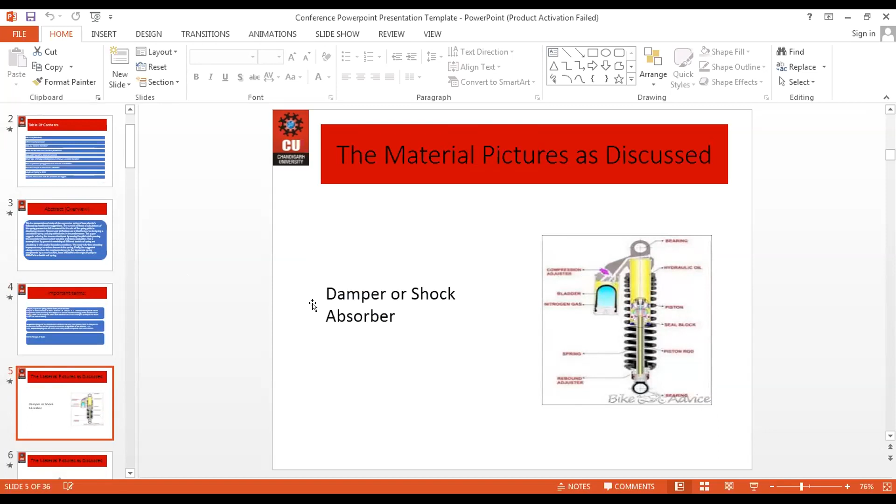After that, moving to the next slide. This is a small picture I'm attaching here, so that we get an idea of the pictorial view of the suspension spring and the damper, the shock absorber.

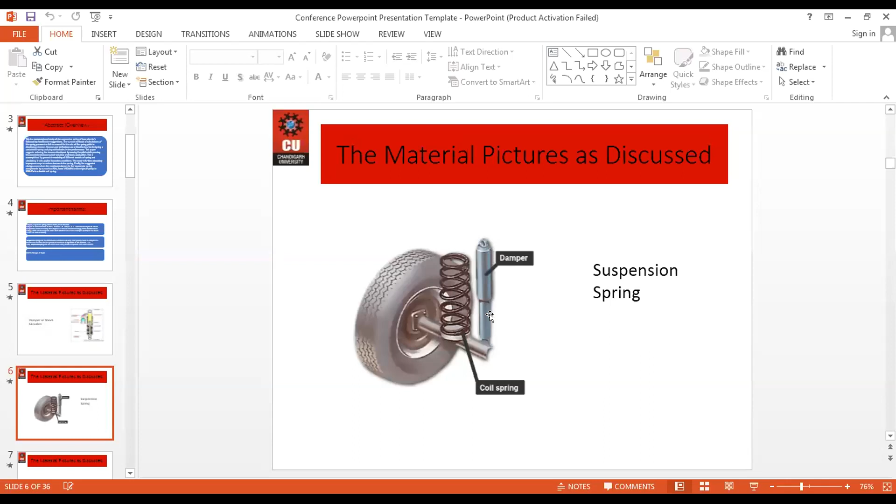Now, in the next slide, I'm going to show the material picture I discussed. You can see that the spring is like that, this is a spring, which is a coil spring, and this is a tire connected with it, and this is a damper that we're using as a shock absorber here.

So moving forward, this helical shape is the shape of the spring that we are using here to modify the two-wheeler suspension.

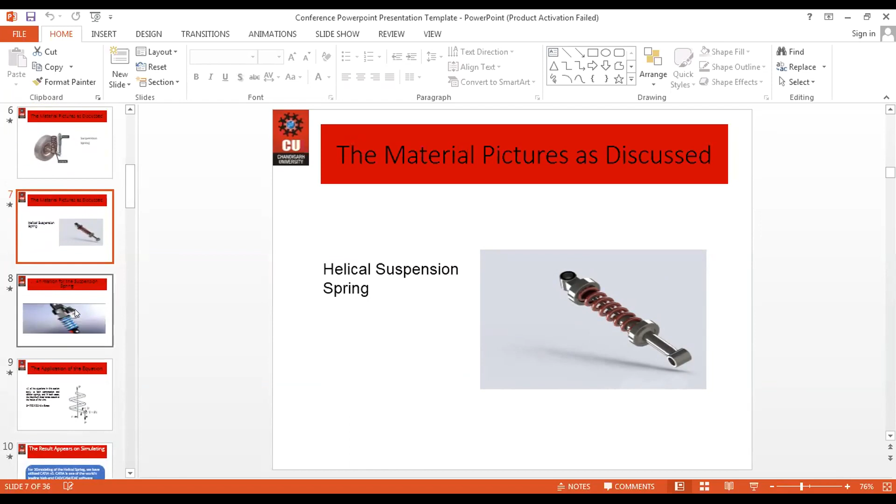I wanted to show you with the help of a video, but I think it's not working here. I don't know why.

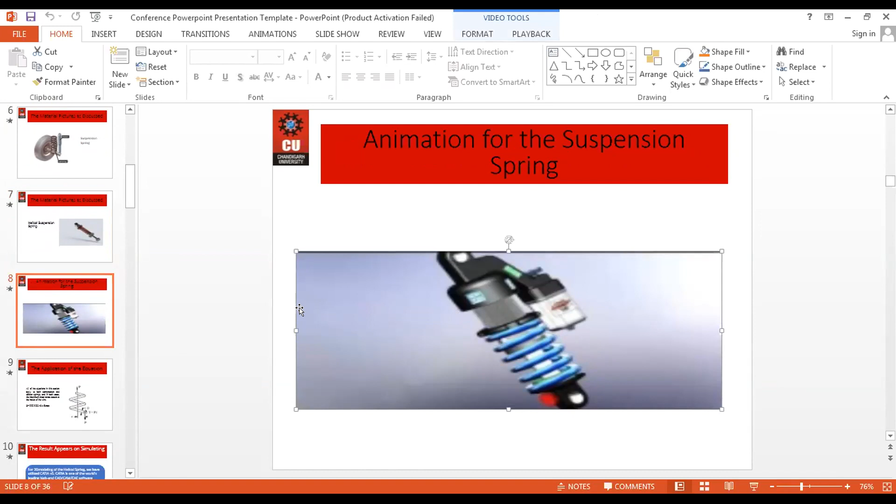Now moving forward, I'm going to explain the application of the equation, the basic idea of what kind of formula we use here to evaluate or modify the two-wheelers. All the equations in this section use compression and tension springs.

This is one type of spring, this helical spring shape, and T represents the torque, and this is the diameter of the spring. We basically use this formula: H represents the force, which equals pi times r squared divided by 4d, into 4d into stress. We put all the parameters into the formula.

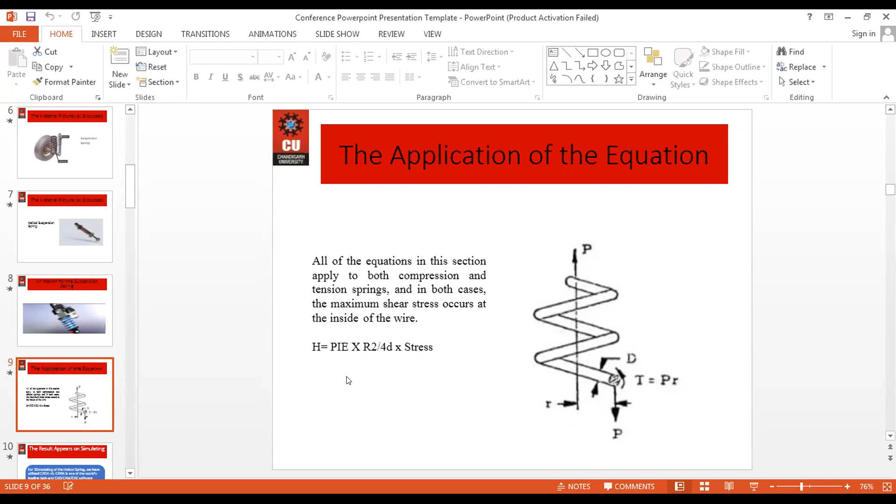If we take different types of springs, so if one spring has a different length and different diameter, we get to know how much force they experience by using this formula. I'll explain with the help of an example in the next slides.

After this formula, I'm going to introduce two simulation links. This is one of them, the simulation software, a 3D modeling software for the helical spring we are using. Its name is CATIA V5. CATIA means Computer Aided Three-dimensional Interactive Application. We use it to compare the 3D imaging of this spring, and to analyze the working and efficiency by doing this modification using this software, which is widely used by IBM and in the market.

So this is one of the springs that we use for the modification, using the software CATIA V5 for the 3D representation of the two-wheeler's helical spring.

To explain this idea, I have one example. Suppose there is one person having a weight of 75 kg, and a second person with the same weight, so the total weight of two persons is 150 kilograms. If both of them are seated on the bike, including the bike, the total weight is 215 kilograms.

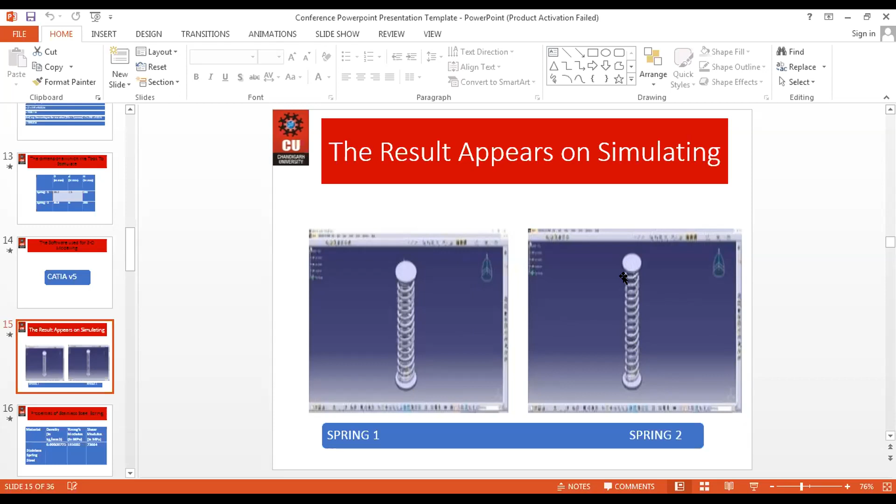These are the results from the simulation. This is the first spring with the larger diameter, and this is the second spring. So in this suspension or extension, while force is acting, the diameter is different and the length is different, but the same force is applied. Now you can see the extension or expansion of the spring in both cases with the help of this software.

In this way we can see the stress and properties of the material we are using to manufacture this vehicle spring, which is stainless steel. We are using stainless steel spring because its density is very, very low.

Its Young's modulus, compared to if I take copper or aluminum as a material, both of those materials have less density, Young's modulus, and shear modulus, making stainless steel very light in weight.

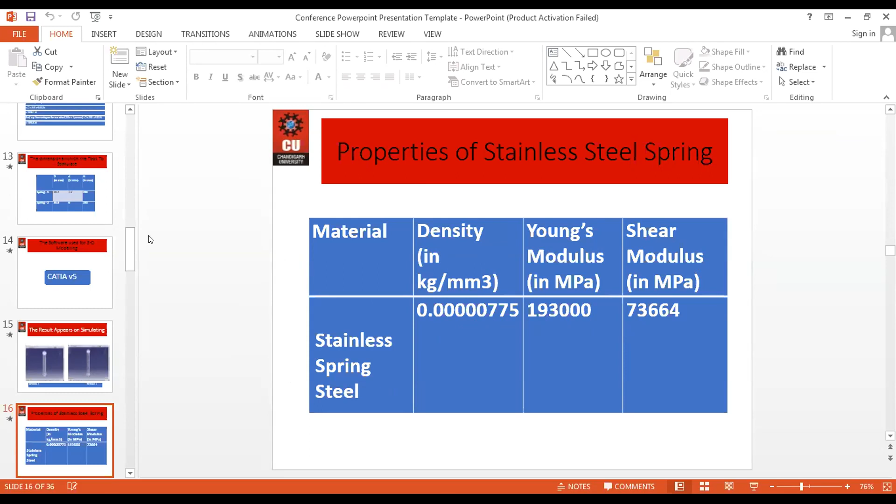After comparing and using this material, now I'm showing you the stress analysis on spring one with different expansions using this software.

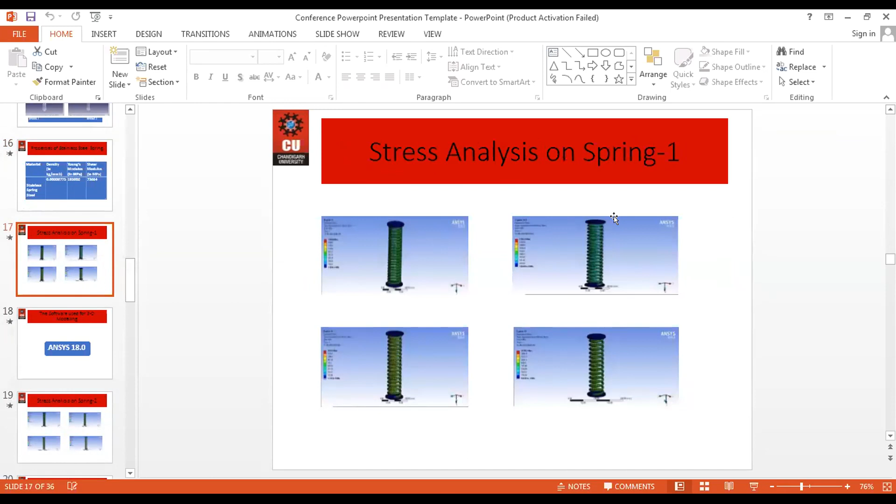Now moving to the next software we're using, ANSYS 18.0, for representing the two-dimensional representation also. This is another software used to represent the simulation part of the helical spring, and these are the related figures. After that we compare the data, which is given by CATIA V5 software, with the data from ANSYS 18.0, while varying the pitch using the different software.

Now you can see that for CATIA V5, with the pitch set to 10.5, the maximum deflection observed is 128.520, and with the help of ANSYS 18.0 software we are getting 2576. So this kind of variation in results is observed with the two software.

So this is the data for single coil helical spring two, which has the load that we calculated earlier. After that, how do we select?

The selection criteria is the same. I'm just giving you, from the above hypothetical assumptions or analysis, two examples of springs.

Taking the first spring, having diameter 56.7 millimeter, their unwinded length is 7.5, their pitch is 20, and the force acting on it is 235.

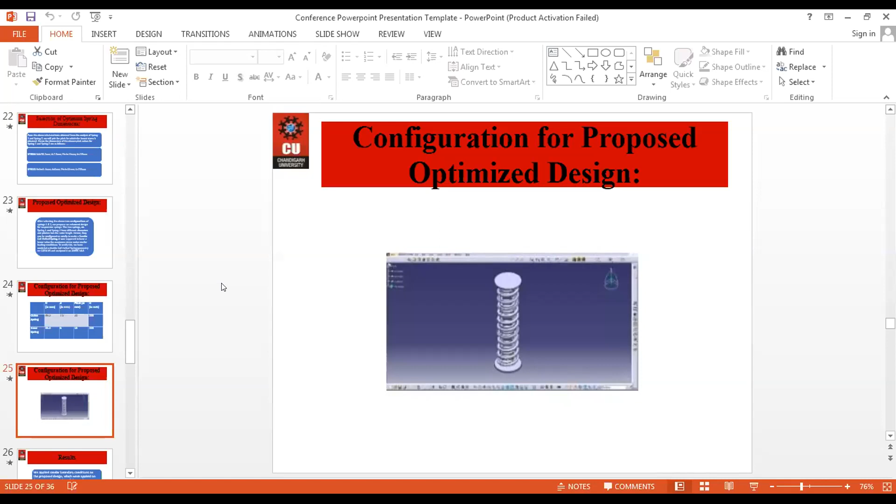Coming to the results which we analyzed on spring 1 and spring 2: after the analysis, we found we can use spring 1 as an inner spring, and spring 2 as an outer spring. When we combined both springs, a helical spring was proposed, and we used stainless steel as the material of the spring.

Stainless steel will not rust easily, and it can take much stress easily. Rather, if you use copper or other aluminum material, it will just break or rust easily.

The boundary conditions which we fixed, as explained by my professor, were: we fixed the load at one end to be 1406 Newton and the other end to be 1896 Newton.

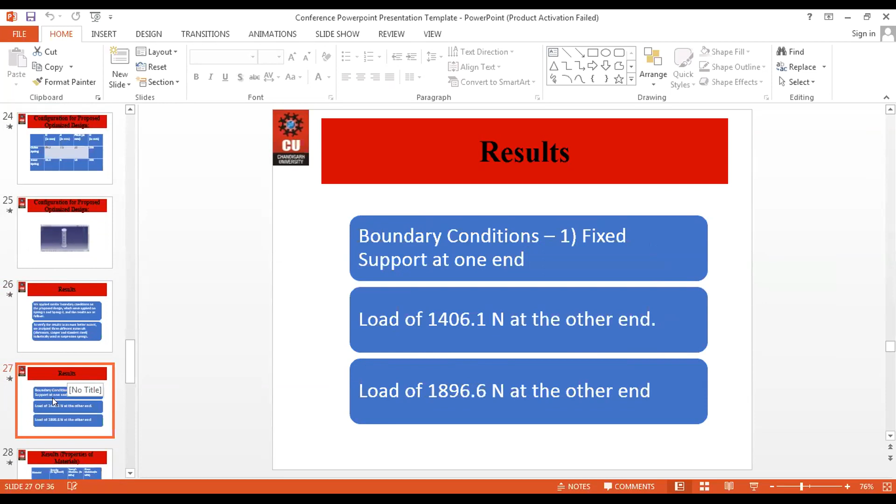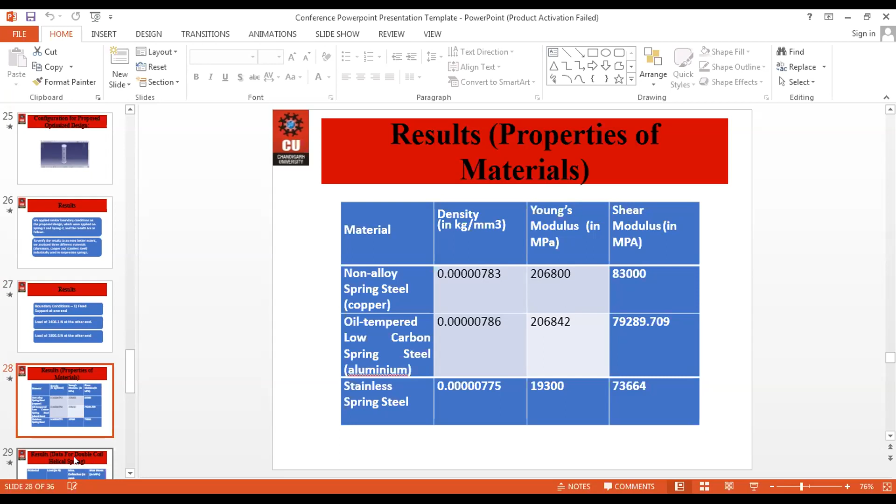The reason for choosing stainless steel was that among the different densities, stainless steel had the least density, and its Young's modulus was also the least. Since we are reducing the stress based on shear stress modulus, we used the shear stress of stainless steel, which was the minimum among the materials considered.

When we calculated it on CATIA V5 and Ansys 18.0, we found that when the load of 1406 Newton and 1896 Newton was imparted on stainless steel, the maximum deflection of the stainless steel corresponded to what result we were expecting. So we used stainless steel.

We did not use non-alloy spring steel and oil tempered low carbon spring steel because the results were not as expected. The force, pressure, or stress which we wanted to reduce was not reducing as much as with the stainless steel.

The observations which we did on CATIA V5 and MATLAB—we plotted all the graphs on MATLAB, and those graphs are shown in the next slide.

Ma'am, next slide please. For the second spring we had proposed, the observation of that graph is in the next slide. This is the analysis of the graph: as first is the stainless steel, the graph is decreasing and increased a little, but it suffices the needs.

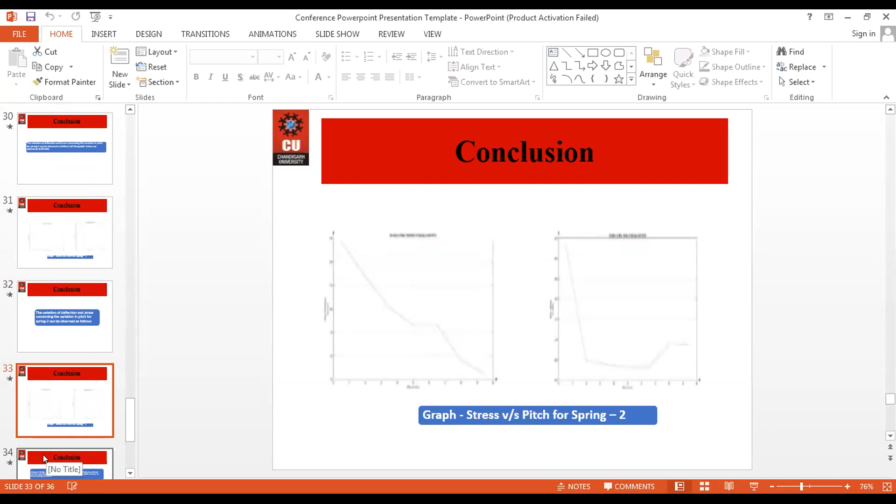Ma'am, next slide please. The proposed design has, as already explained by my professor, that spring one has pitch 20 millimeter and the second spring has pitch 15 millimeter. The forces and boundary conditions we set are already explained, and the double coil helical spring is 958.20.

Ma'am, can you move to the last slide?

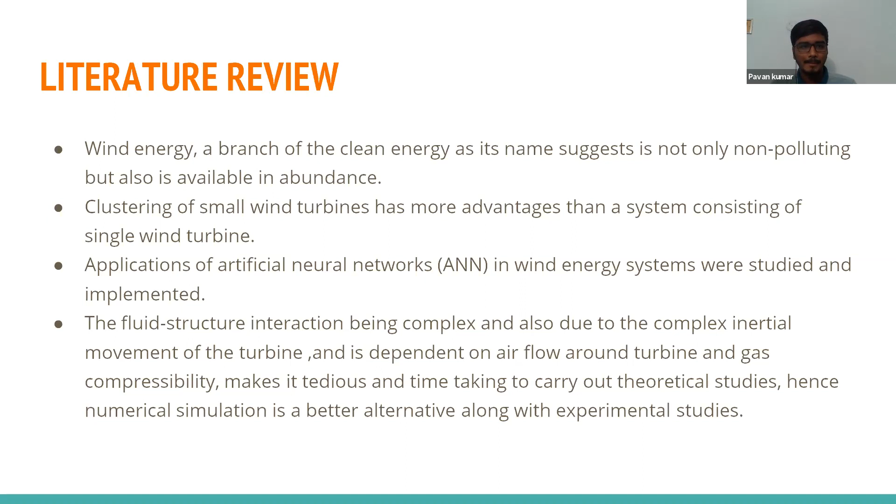CFD is a numerical simulation method that can obtain the flow field around the turbine virtually, and also we can calculate various parameters required for estimating power output and other such quantities. TRNSYS has a predefined component used in renewable energy systems that can be modified according to our system. For example, we can enter our power curve data of the turbine according to our system. An economic feasibility study was also conducted using thermoeconomic analysis, and results were studied.

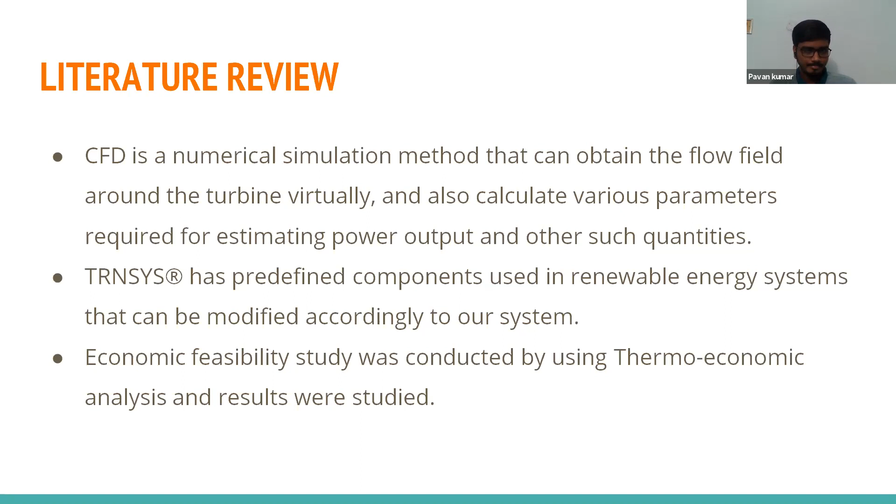ANN analysis: we have conducted two types of analysis, namely classification analysis and time series analysis. ANN technology can map input vectors to the corresponding output vectors without assuming any fixed relationship between them. In this study, ANN is used to estimate the presence of a number of turbines at a certain height. Input data given has three features, which are height, wind speed, and power generated from the turbine at that particular height.

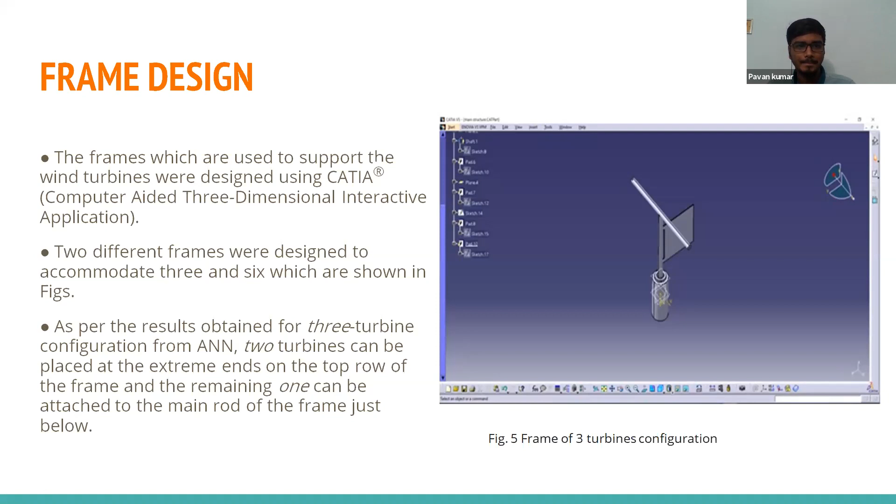For the 6 turbine configuration, 3 turbines can be placed on the top row, 2 on the row below, and the remaining one can be attached to the main rod further below.

The bearing, shown in the figure, allows the main structure to rotate about the vertical axis, and the tail helps to align the direction of the wind. This is the tail. The lower part of the frame will be welded to the outer race of the bearing, and the upper part will be welded to the inner race of the bearing.

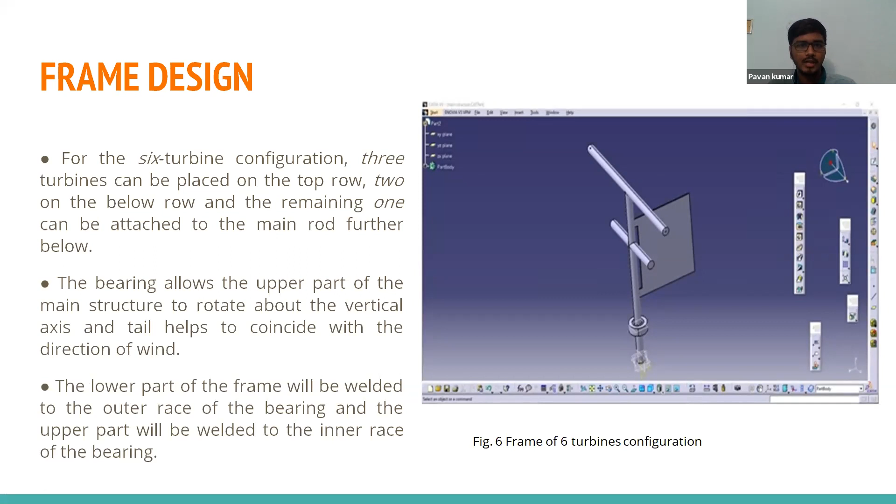CFD analysis was done in ANSYS. The flow analysis of the turbine system at different velocities was carried out for 3 different cases: single turbine system, 3 turbine system, and 6 turbine system.

The mathematical model used for the simulation was a realizable K model with scalable wall conditions. The boundary conditions given were constant velocity at the inlet and constant pressure at the outlet, that is 0 gauge pressure.

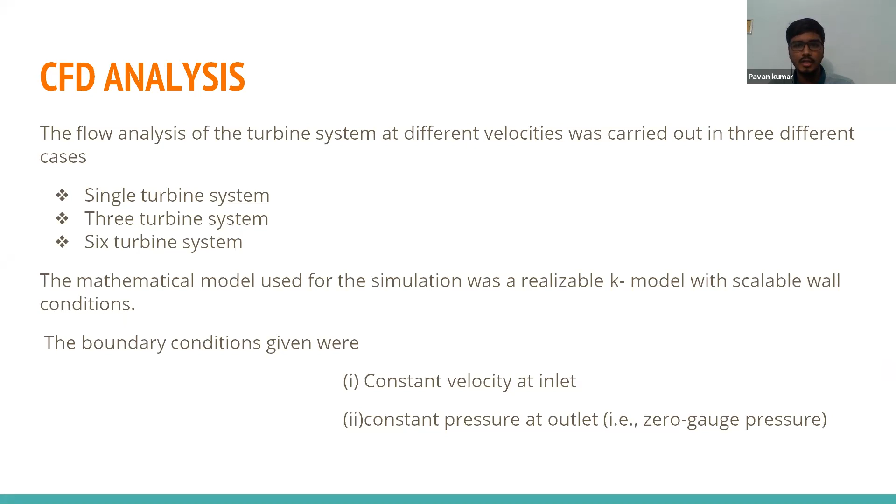The flow analysis was carried out for the single turbine system at different velocities: 4, 8, 12, and 16 meters per second respectively. The moment was obtained, and the power was calculated with the help of a formula.

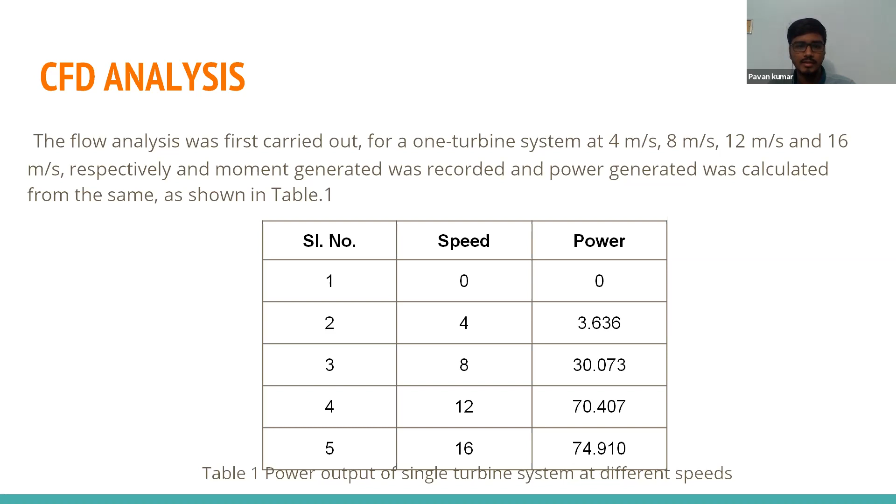Power equals torque multiplied by omega, the angular velocity, which is the angular speed given to the mesh rotation. The speeds and power obtained are tabulated as shown. For 0 speed there will be no power obtained, and for the velocity of 16 meters per second, we got 74.9 watts.

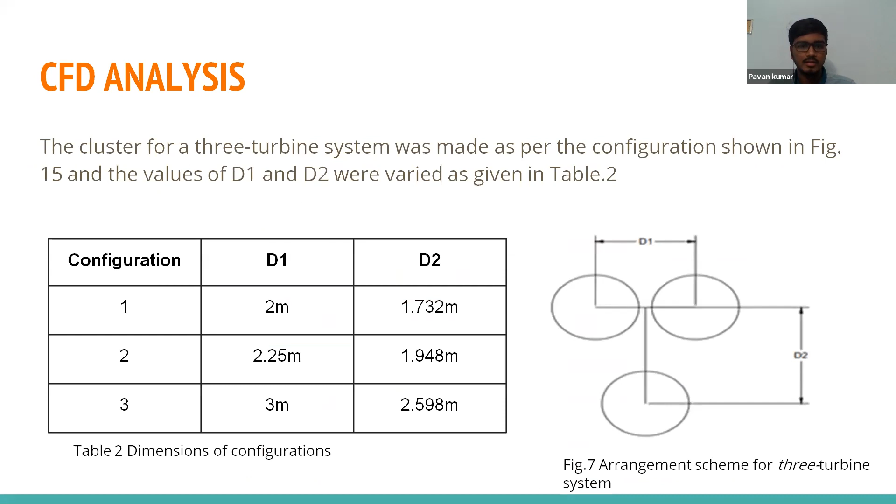Similarly, the same analysis was done for the cluster of 3 turbine system, as shown in the figure. D1 represents the central distance between the 2 turbines present on the top row, and D2 represents the height between the first row and the second row. These configuration dimensions are tabulated.

For each analysis, the same velocities were used: 4, 5, and 6 meters per second. In each case, the moment generated was noted and the corresponding power generated is shown in the table. For an interdistance of 2 meters, we got an average power of 32.867 watts; for 2.25 meters, average power was 32.874 watts; and for 3 meters, average power was 32.661 watts.

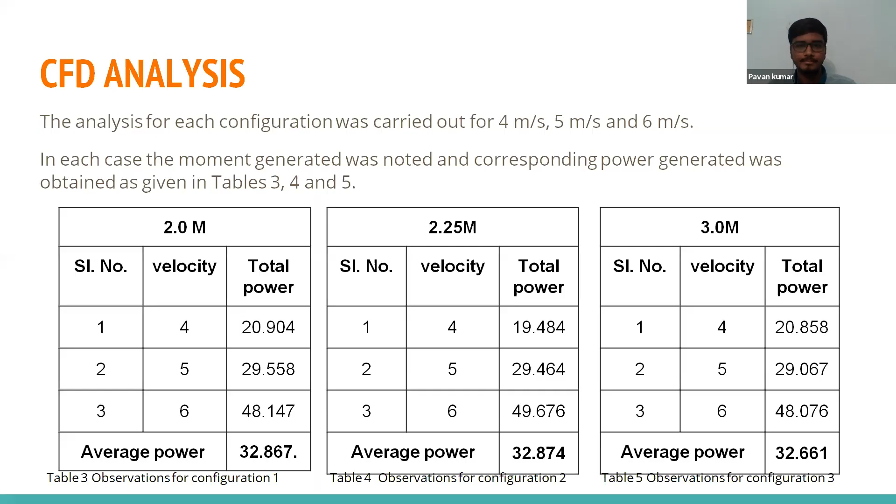Spatial arrangement for the 6 turbine system was made as an extended version at 2.25 meters. Similarly, 4, 6, 8, and 10 meters per second were given as inputs, and the total power obtained was tabulated as shown.

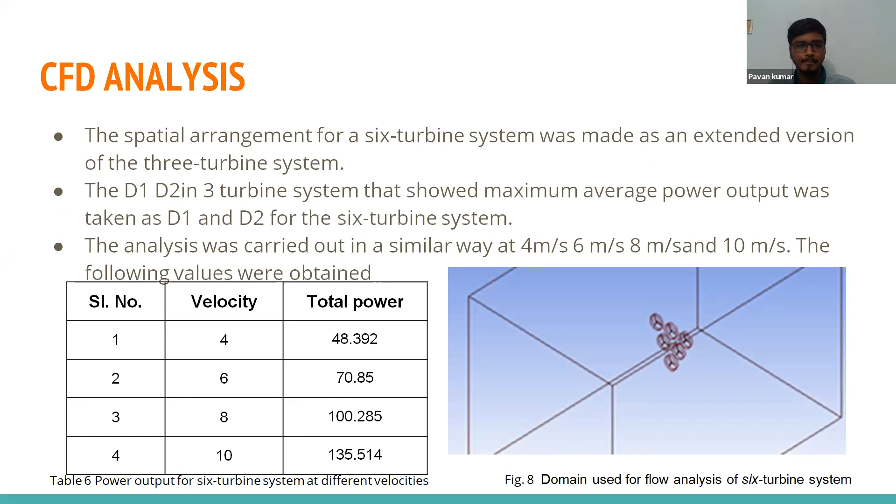TRNSYS and Excel based analysis. With the results obtained from CFD analysis power curve, plots were plotted in Excel using different configurations of the turbine, using the trend lines. Our system in TRNSYS consisted of 4 components: input file, wind turbine, printer, and plotter.

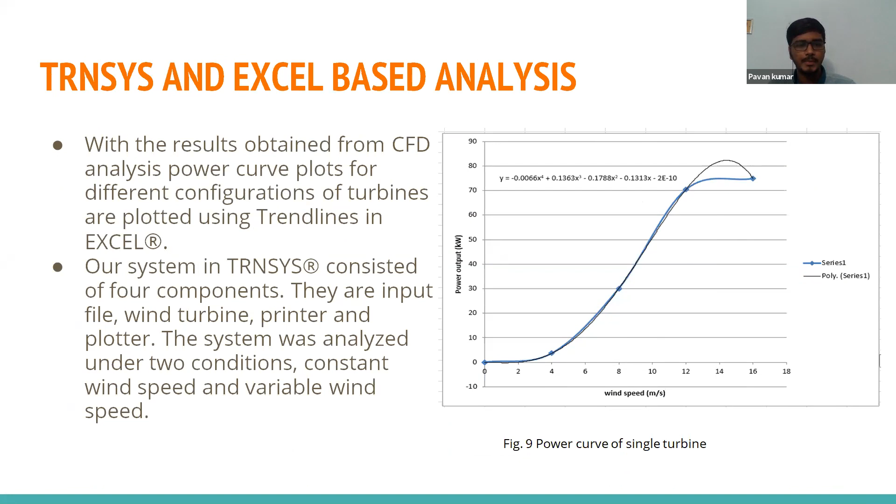The system was analyzed under 2 conditions: constant wind speed and variable wind speed. An experiment was conducted to validate the system in TRNSYS under constant speed conditions. The experimental setup consisted of a fan, a turbine, fan stands, and other measuring equipment like multimeter and anemometer. So this is the experimental setup.

We gave a power of 28 watt to the input fan, and it produces wind. There would be some losses, and the wind turbine will produce energy from the wind, kinetic energy of the input, and the kinetic energy of the remaining wind. The velocity just before the wind turbine was 2.1 meter per second, and the velocity just after the wind turbine is 1.6 meter per second.

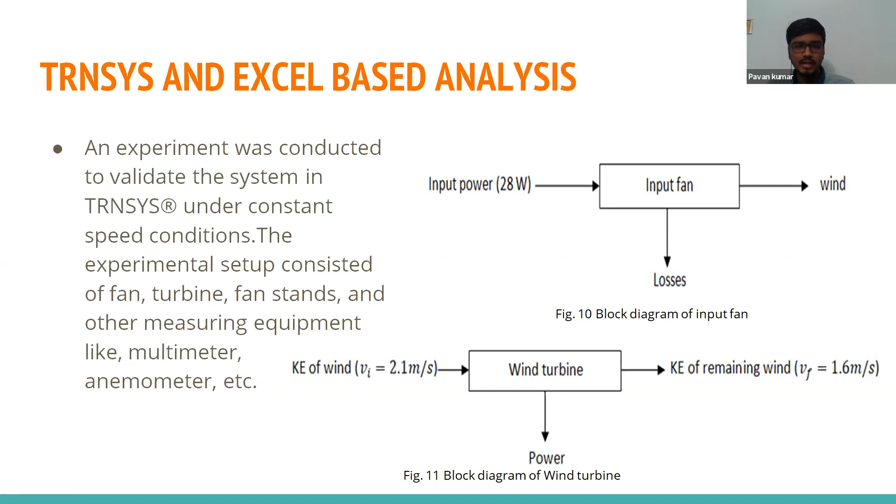The difference between these kinetic energies will be collected as power. So from the TRNSYS and Excel based analysis, the power output obtained from TRNSYS are matched with the experimental results. That is, we gave an input which is constant power, and we can see a red line which is also a constant line showing in the TRNSYS.

For variable wind speed conditions, we used annual weather data of Kozhikode location situated on the southwest coast of peninsular India as an input to the system. We analyzed the system in Excel and plotted the annual power output curves for different configurations of turbines with the help of trendline equations.

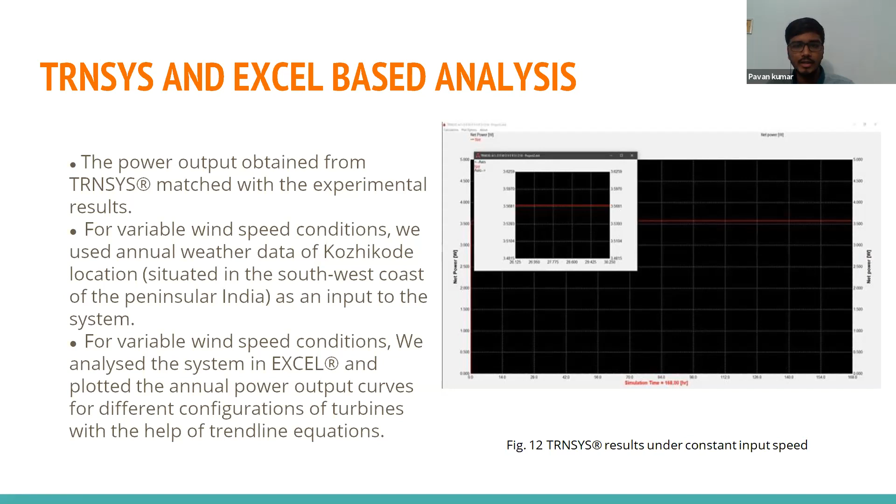Thermoeconomic analysis. This analysis is being conducted to analyze the economic aspects of this project and to understand the economies of scale, and to find the best configuration from both thermal and economic aspects. This analysis is conducted in 3 cases, namely using a single turbine, 3 turbines, and 6 turbines.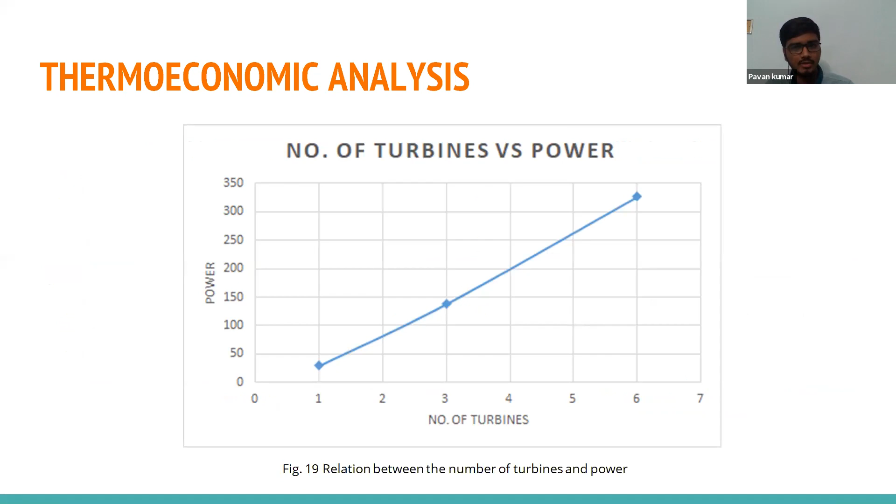And number of turbines versus power, as we know, as we increase the number of turbines, input velocity is constant. So more number of turbines means more power is produced.

Results and conclusion. The moment obtained from the simulation using ANSYS was used to calculate power output at different velocities, and using this, the power curve data was plotted for single turbine system, 3 turbine system, and 6 turbine system. For the 3 turbine system, the fan to fan distance was varied, and 3 cases were observed for the power output, and a configuration correlation was obtained.

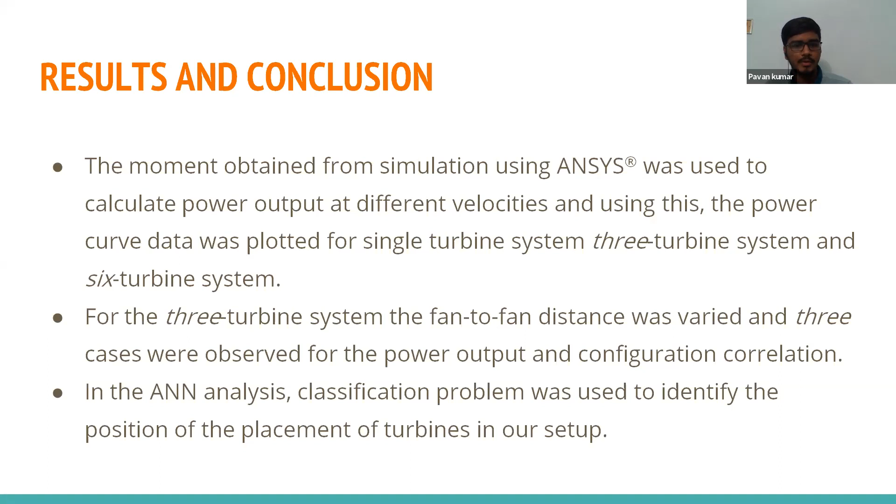In the ANN analysis, a classification problem was used to identify the position of placement of the turbines in our setup. These results were used to validate the positions taken in the ANSYS analysis, and all subsequent analysis were done, such as CFD and Thermoeconomic Analysis.

The data obtained from the flow analysis conducted on ANSYS were used to prepare the power curves of the 3 different sets of turbines in TRNSYS and MS Excel. With the power data curve obtained and the weather data, it was seen that the annual power generation was as follows.

For the 1 turbine system, it was 29.20 kilowatt hour, for the 3 turbine system, 138.1 kilowatt hour, and for the 6 turbine system, 326.5 kilowatt hour. As we see, as the number of turbines increases, the power produced also increases.

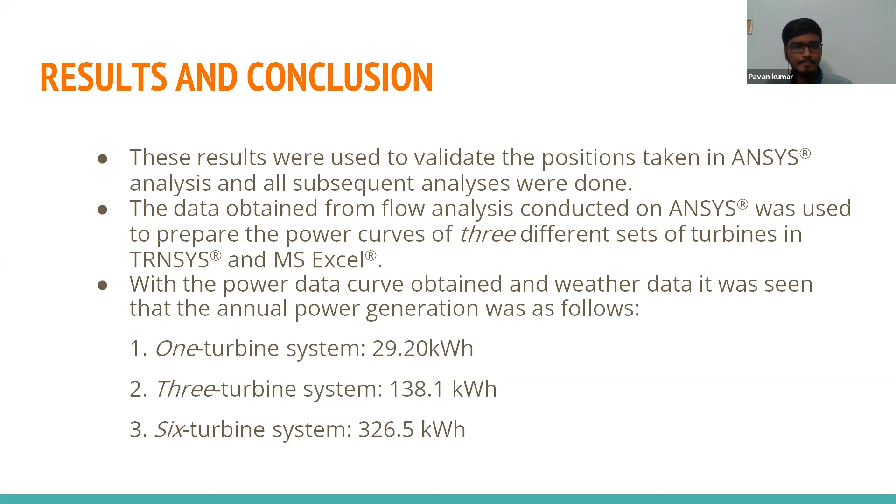In thermoeconomic analysis, with the help of data obtained, the total power generated over a year was estimated, and the setup costs for all 3 cases were individually calculated and reconfigured according to requirements. From these calculated values, the simple payback period was found for all 3 cases, and it was seen that the 3 turbine system is more economically viable than the other two systems, the single turbine system and the 6 turbine system.

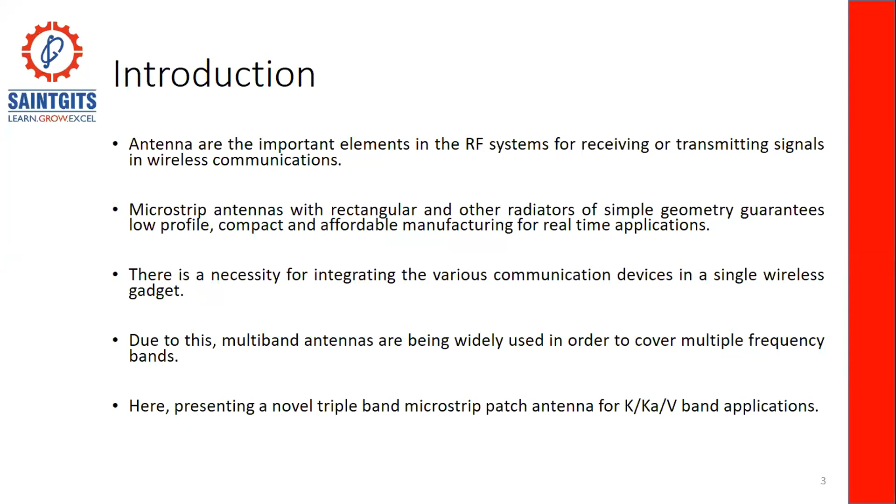The major objectives we had in mind while designing this antenna were: designing a compact antenna through effective miniaturization of antenna elements, integrating modern portable wireless communication applications, designing and developing a novel and simple technique to reduce the antenna size, and creating a multi-band antenna with low profile design and wider impedance bandwidth.

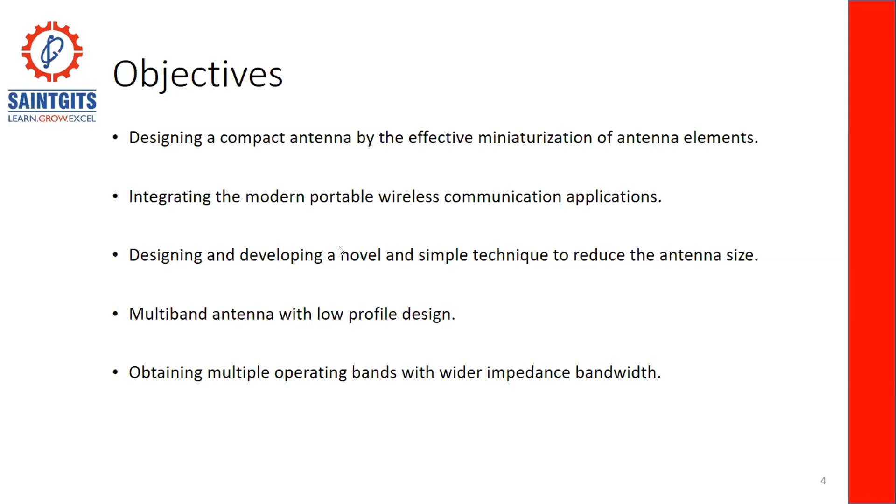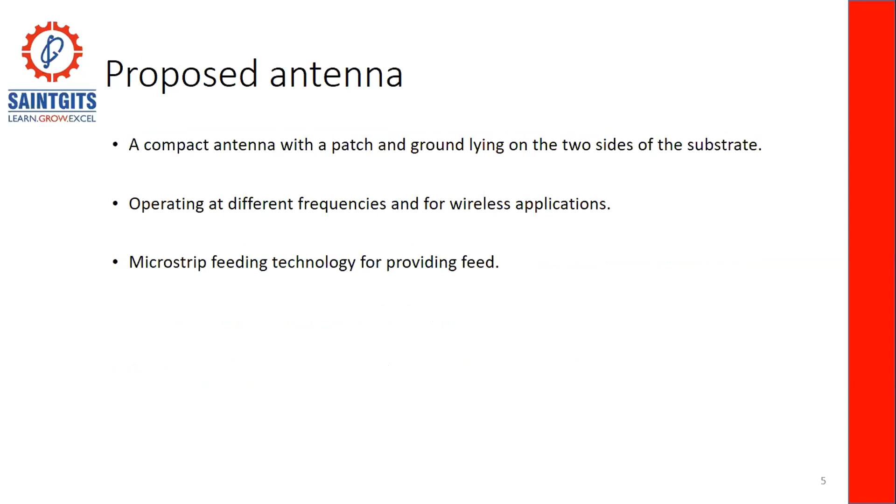Now let's see how the proposed antenna we designed turned out. The triple band microstrip antenna designed is a compact antenna with a patch and ground lying on the two sides of the substrate, operating at different frequencies for wireless applications. We used microstrip feeding technology for providing the feed.

The tool used for designing the device was HFSS version 16. Here, we will discuss the substrate used for designing the triple band antenna. The loss tangent and the dimensions of the antenna in terms of substrate size is 10 by 13 by 0.254 mm cubed.

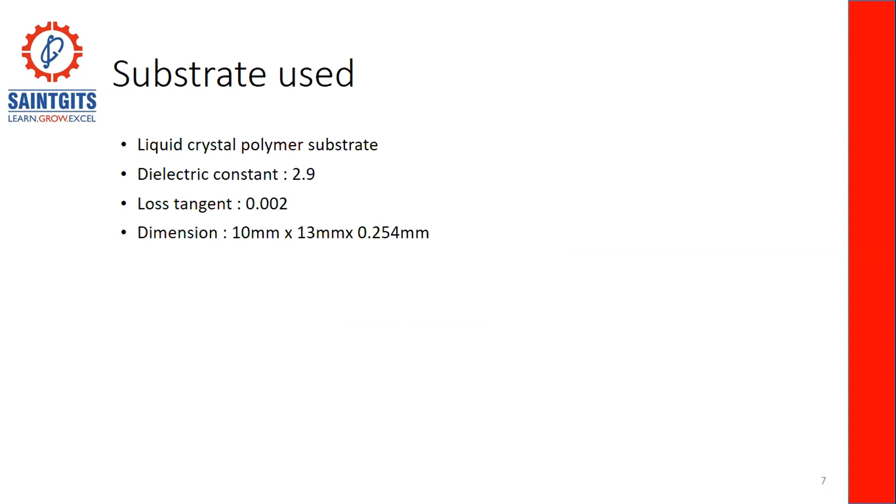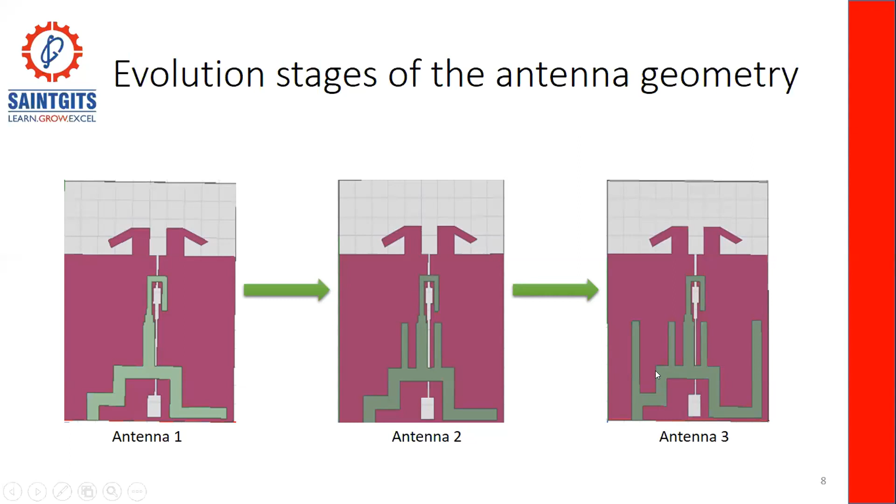This is the final geometry of our antenna. To make it clear, we have separately shown here the ground as well as the patch of the triple band antenna.

Now it's time to discuss with you the simulation results of the triple band antenna. The antenna was designed using ANSYS HFSS version 16.

To discuss the antenna characteristics, we took into account the simulation results of various antenna parameters such as return loss, radiation pattern, VSWR, current distribution, and gain. So let's move on.

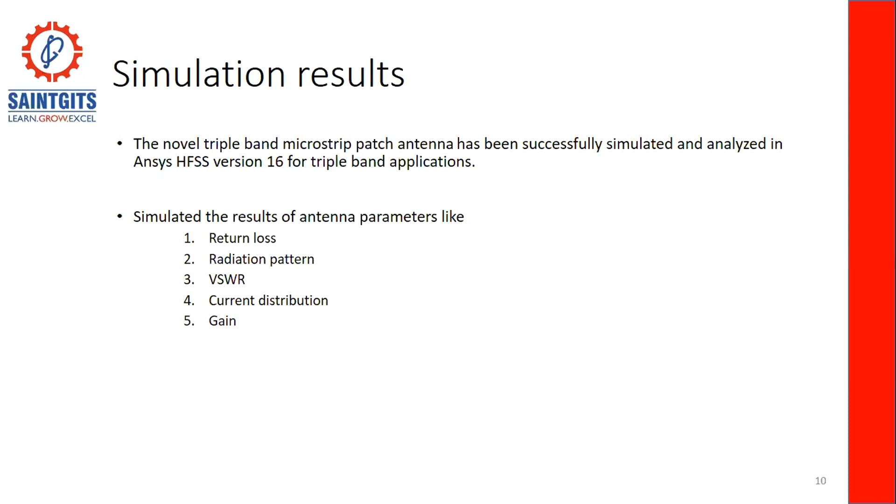In a proper definition, return loss is defined as the loss of power in the signal returned or reflected by a discontinuity in a transmission line. But what we need is always a simpler approach when it comes to practicability. That's why it is said that return loss is a quantity often used within RF circuits where impedance matching is important. The return loss is the proportion of a signal that is reflected as a result of an impedance mismatch.

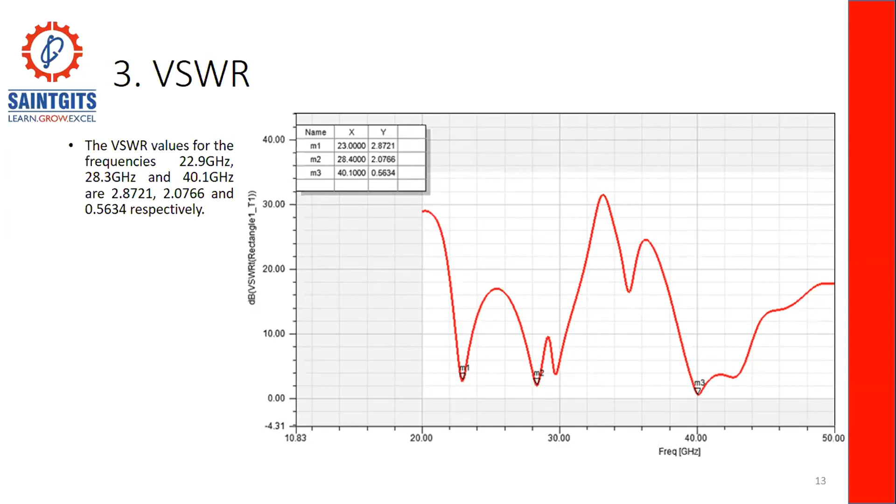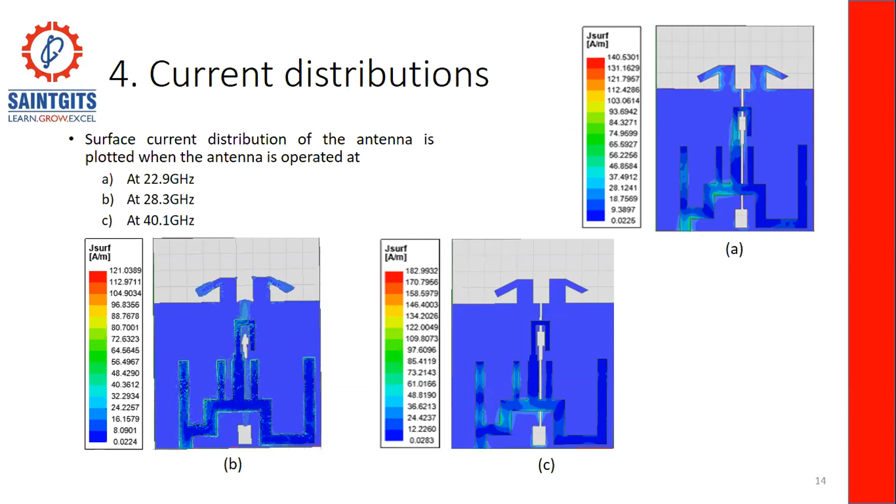Antenna gain is a measure of directivity properties and the efficiency of the antenna. When the antenna has a higher gain, it does not increase the power, but the shape of the radiation field will increase the length of the distance of the propagated wave. The higher the gain, the farther the wave will travel, concentrating its output wave more.

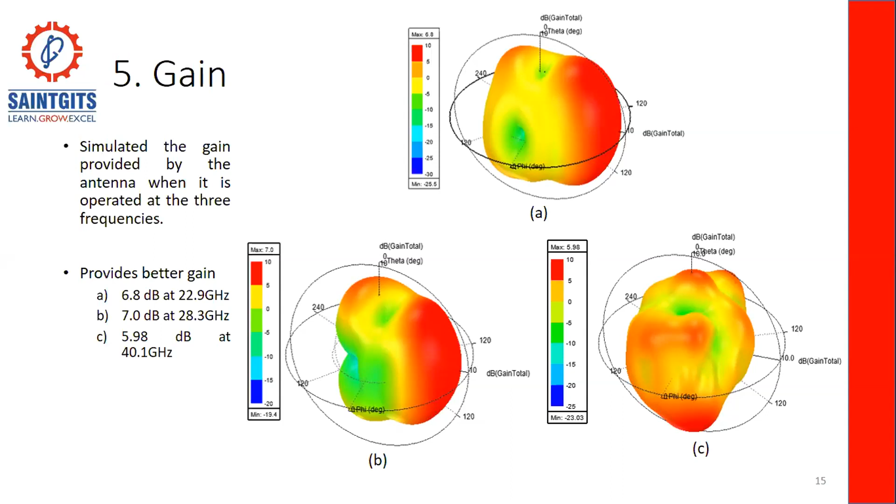Next, we will discuss the applications of the triple band millimeter antenna. The primary applications of the antenna are K-band, Ka-band, and V-band applications in general.

In detail, the K-band frequency of 22.9 gigahertz has an application list including satellite communications, astronomical communications, radars, high resolution and high throughput communications. The applications of the Ka-band frequency, 28.3 gigahertz, are satellite communications, close range targeting radars, high bandwidth communications, and high power transmission.

The V-band frequency, 40.1 gigahertz, mainly finds its utilization in high-capacity terrestrial millimeter wave communication systems, or what we see today, the 5G systems.

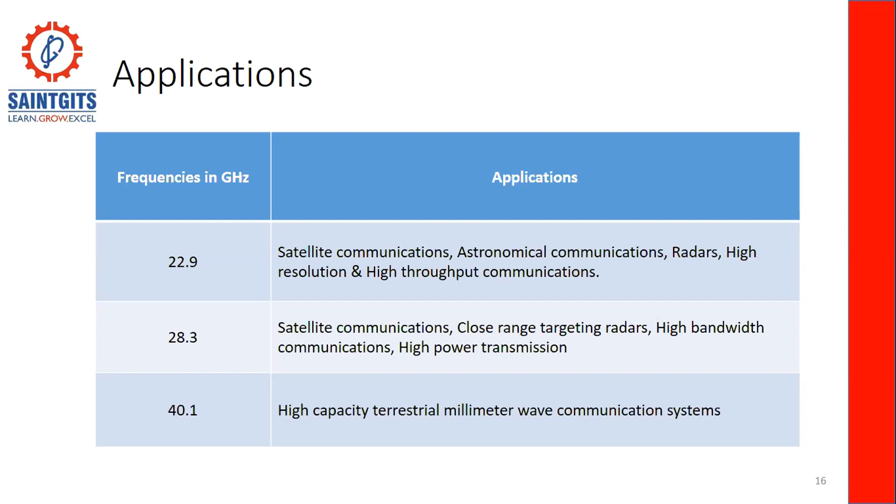The main attraction and the novelty of this work, as I said in the previous slide, is that this microstrip patch antenna is very compact compared to other existing antennas with similar applications. This is what we do, and thank you.

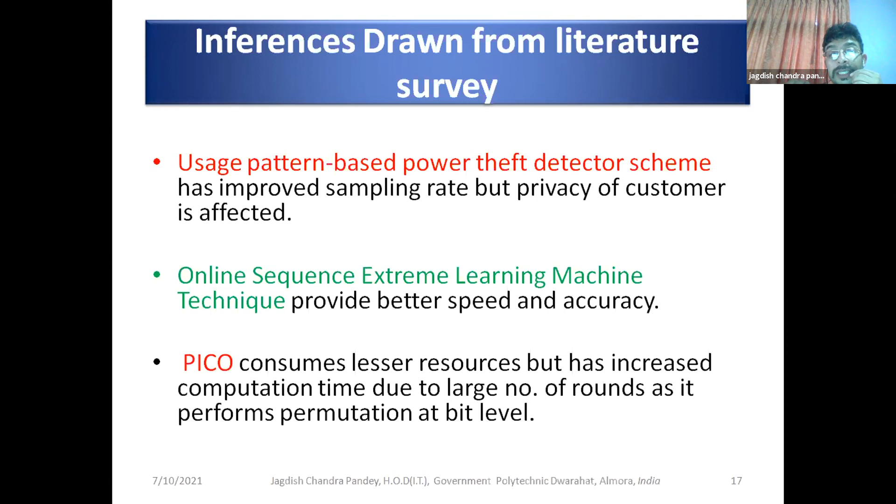PICO is a lightweight encryption technique. It consumes lesser resources but has increased computation time due to large number of rounds as it performs permutation at bit level.

So the need of the hour as far as smart grid or other resource constrained devices are concerned, we need a combination of 2 or more existing cryptographic approaches, because one single cryptographic approach cannot fulfill the needs of these types of applications which are resource constrained. So we need a hybrid lightweight approach for securing sensitive data and provide improved results in terms of memory, space, time, and computational complexity, while still providing the same level of security as provided by the best conventional cryptographic techniques like AES, Blowfish, etc.

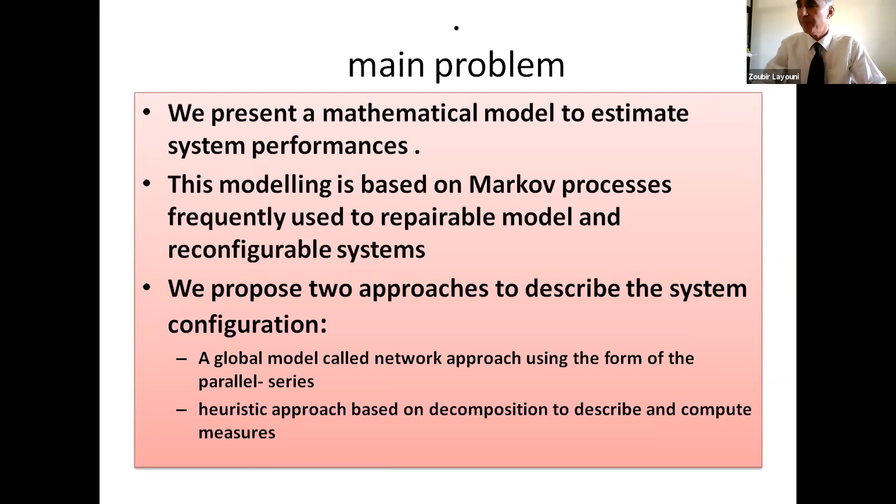The second phase is to give some definitions and notation about the modelization. We define availability to represent the probability that the system is capable of conducting its required function. The reliability is defined by this function. This is the probability that the component survives until some time t.

Our process considered here is about the two exponential case. This is very important for modelization. All definitions defined here are summarized as follows: the reliability function, this form, failure distribution function, density function of failure, failure rates, and mean time to failure, and at the end, system reliability of all the system.

The methodology of approach consists of illustrating the system using the form series parallel or parallel series, doing the statistical analysis, computation of reliability and availability, and at the end, comparing the best method.

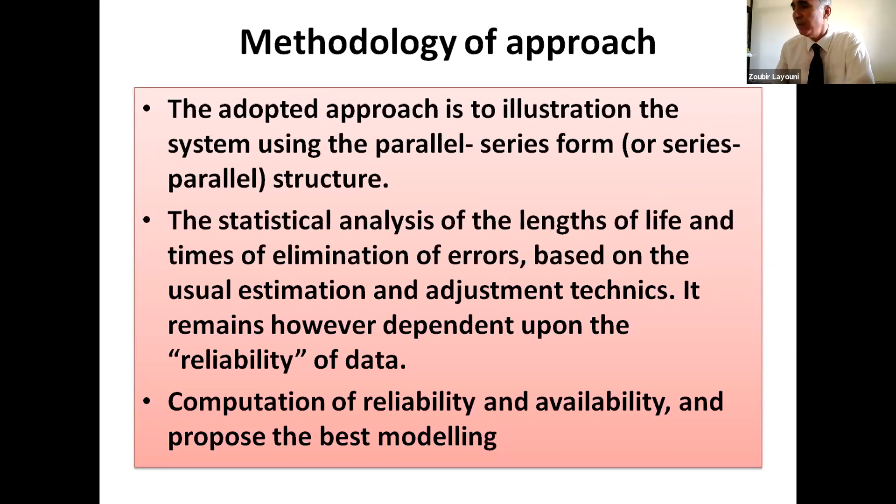The first work consists of presenting the complexity of global modelization. This is based on a network approach. We consider that the system is composed of n blocks. Each block is composed of ng parallel elements as shown in figure 1. We'll assume that the reliability of element has exponential rate of failure and the rate of repair.

Here we assume that we propose two hypotheses. The first one is that the elements of block G have the same reliability, where lambda G is the failure rate of each element of block G, and xeg is the life length of element E of block G. The second hypothesis is that the element which fails is oriented with probability equal to A toward the minor repairing station, like this. And at the end of the stay in the minor repairing station, the element is confronted to the following situations.

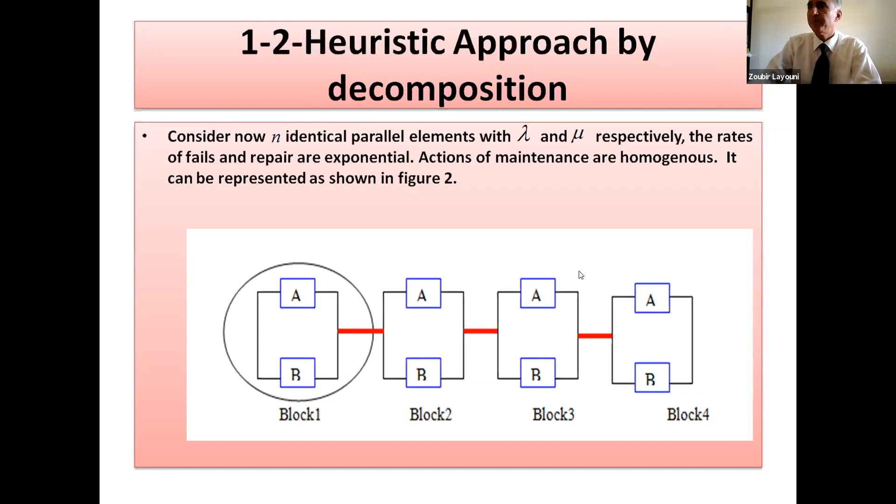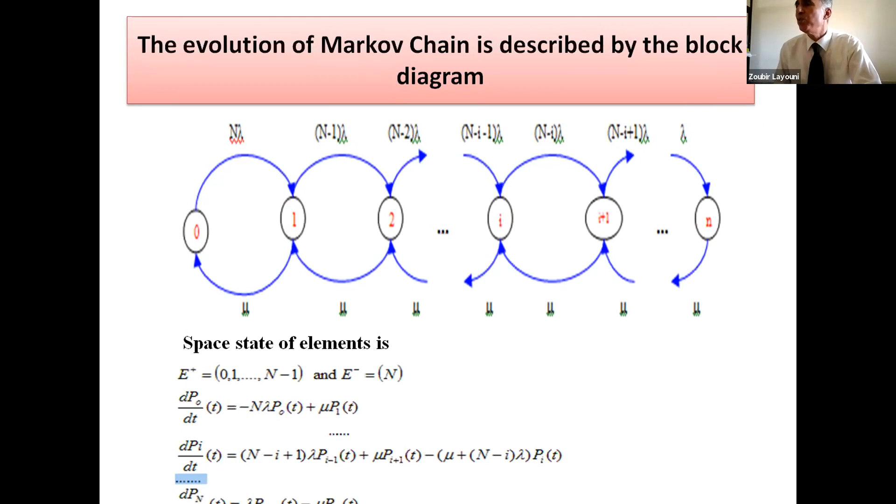We make an example for two parallel elements, and we expose the state of the system, and applying the Laplace transformation and inversion, we will have the possibility to solve the problem.

The availability is determined by these probabilities, and the reliability is obtained by the equation system where state 2 is absorbed.

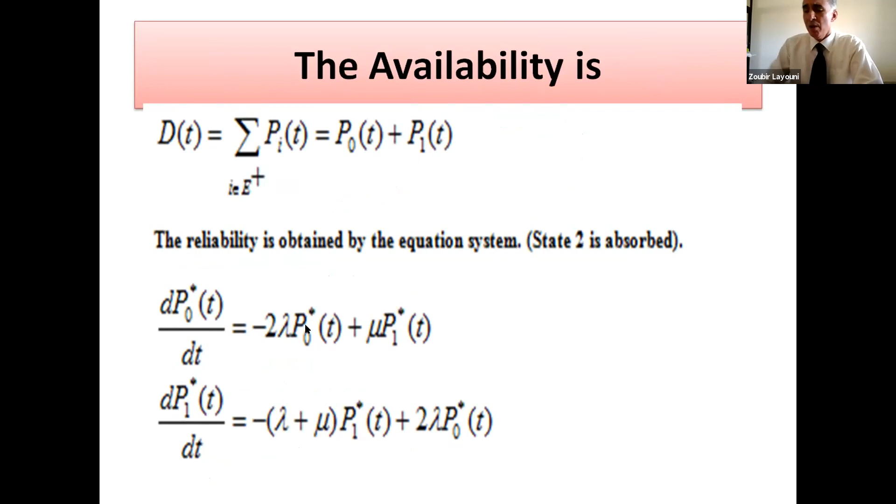The reliability of the system is defined with application of the Laplace transformation in this form, and the reliability of block E is given by this system, where constants S1 and S2 equal this function, representing the result of the Laplace transformation.

The advantage of this model is that it leads to a simple Markov chain model with three states, and in the case where minor and major interventions are distinguished, we have four states. Statistical data are easy to get, and implementations are developed.

The disadvantage of the system is that we suppose the maintenance actions for each type of action are independent. If this hypothesis is false, the property of Markov will not be verified. It is known elsewhere that this type of organization of maintenance is not profitable in practice. So the evolution might not become conform to reality.

These results must be confirmed by validity of the numerical data, and the possibility of generalization in the case of an arbitrary law. The application done here is presented by the physical model used in the process of...

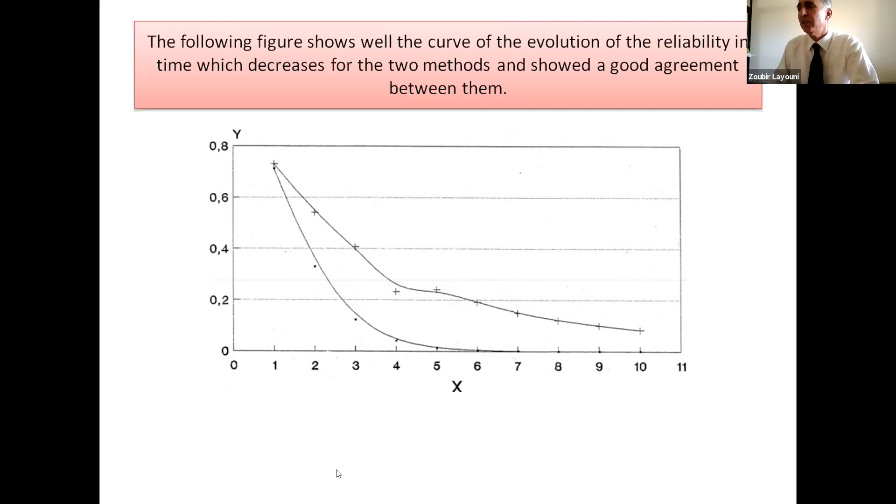In conclusion, it is clear that the availability becomes stationary at T equal 20 when the reliability aims towards 0 as time elapses. The global method explores several numbers of states. If we compute the availability of the system, we can manipulate a matrix with dimension 28 by 28, 81 by 81, and this is the case for law of reliability where reparability is exponential.

We can also use the method of fictitious states of Smith. It is important to think about the method to explore the solution. A heuristic method can be found, especially for our models, that is very simple to implement. This makes the system very heavy and simple to model.

We have selected the representation of the system with minimal cuts based on the decomposition. It permits identifying the nature of failure and impacts. The evaluation of availability or reliability is performed with Markov modelization. This form of representation is initially opted for several reasons: simple statistical analysis, exponential law. We can also make a generalization to other cases.

The disadvantage of this method is the explosion in the number of states in the general case. This number of states makes implementation very difficult because of this situation, where the matrix has to be manipulated. Finally, we have to improve the numerical stability of algorithms and work to propose an extension for other statistical laws. Thank you for listening.